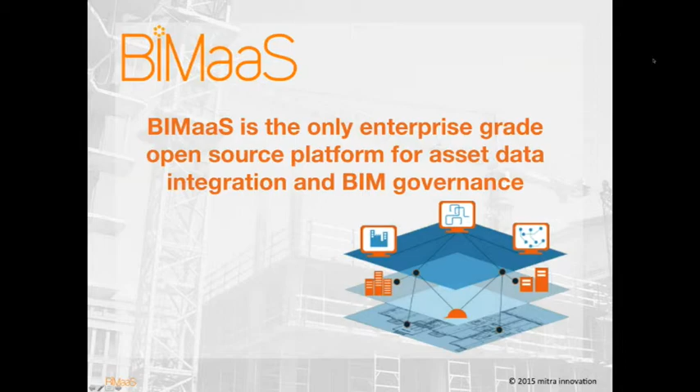Let me just start from where Ashok stopped. We are just going to talk about several key benefits on top of BIM as a service platform. So as Ashok mentioned, what we have built is a platform on top of a very sophisticated middleware platform called WSO2. So what BIM actually offers is a shared and collaborative platform.

The underlying platform of BIM is something called Industry Foundation Classes, also known as IFC, which comes with a specification. An IFC file actually contains the geometry of a particular building, whether it's a horizontal construction or a vertical construction, and it has so much information.

The idea is that you can actually share this file between different parties and get it into one single place, what we call the common data environment. So ultimately what you have is the power of information, where you have a central model to work with.

So what we do basically in the platform is provide 6 different benefits, which are: share, collaborate, analyze, visualize, govern, and learn.

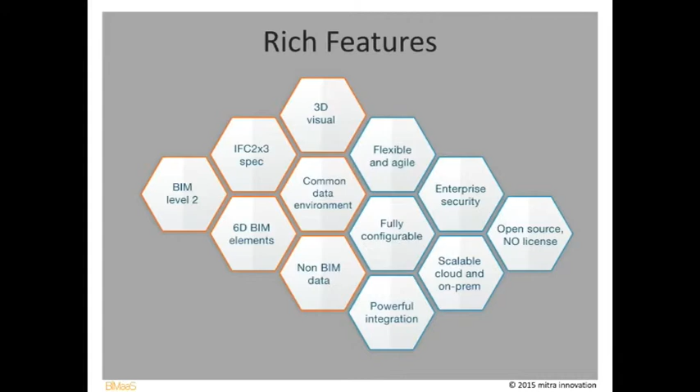So coming back, a high-level set of rich features from the application: we have 3D visualization, and we support the IFC 2x3 specification right now. Soon we are going to support IFC 4 as well. So right now, anybody who adopts the system eventually gets BIM level 2 compatibility.

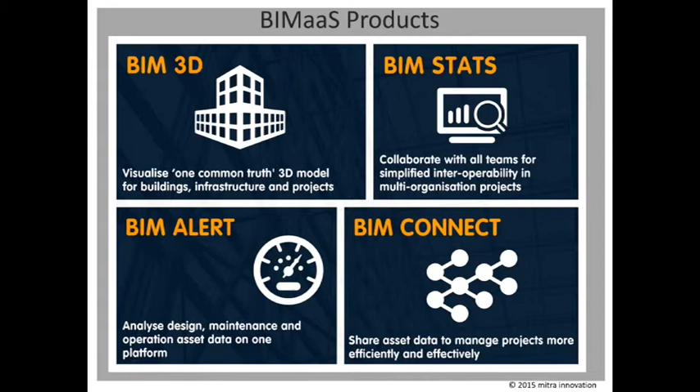We also have built-in functionality with our integration platform to support up to 6D BIM elements. As you know, the 4D and 5D elements of BIM talk about time and cost, and 6D talks about operational aspects where facility management comes into play. We have real good capability with our underlying platform to easily integrate financial systems, project management systems, and facility management systems into one single place.

So you can see a common data environment, known as CDE, is really capable with our platform. Any application that is BIM compatible, like ArchiCAD or Autodesk Revit, is capable of producing IFC files. But if there are non-BIM applications not capable of generating IFC compatible files, we should be able to convert them using different plugins and extract information into our platform, which has the capability of converting those into BIM compatible data.

Our platform is very highly configurable, so we can have configuration modules to cater to any kind of scenario. It's very flexible, very scalable, and can run either in the cloud or as on-premise installations. And the best part is the solution is offered as open source.

We have on our site a listing of where the source is located - it's a GitHub account. Anybody can download the source, compile it, and start using it. There's no commercial license; it's offered under Apache 2.0. But of course, we have our support agreements for whoever likes to implement the project and go ahead with it.

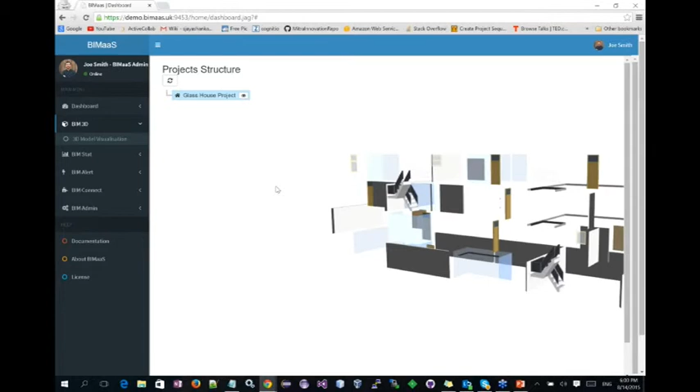Let me go to the BIM 3D, which is our visualization platform. You can see this Glass House project is listed here. I can just click on it, and the project is plotting now. This project is actually created based on the geometry of the IFC file that we submitted to the platform, so now I can visualize this whole model.

I can zoom in, zoom out, see the elements inside the project, and see all the elements of this particular project. I can list them down, and this will show you the project structure of that IFC file. It has different buildings, and inside the different buildings you will have different elements configured for this model.

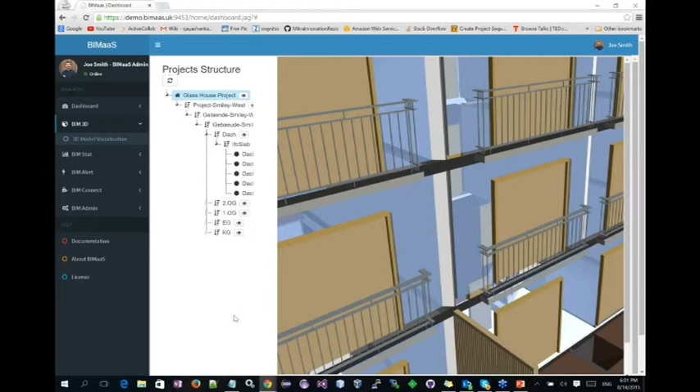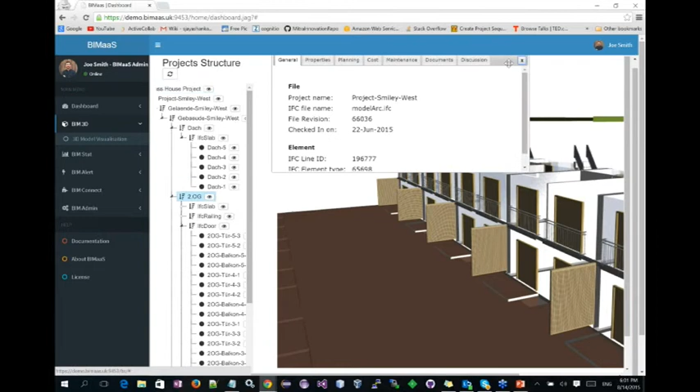I can identify the doors, the windows, and all that information here from the project breakdown. I can also turn off and turn on certain elements of the project. So if I turn this element off, I can completely take off this third story. I can look through, and if I want to view it again, I just click it back so that it comes back again.

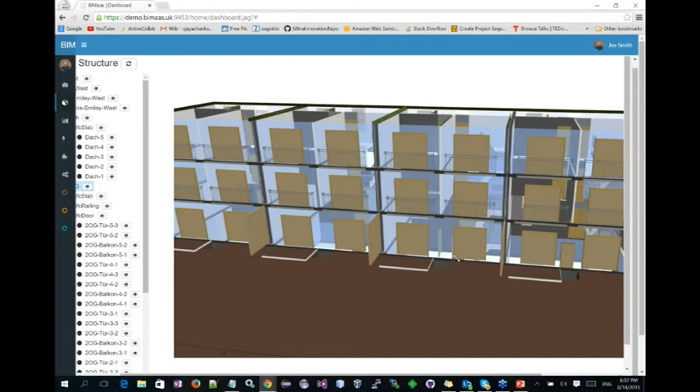The one cool thing about this is the information window. When I click on a particular element, this window comes up and gives you information about that element. So I just clicked on a door, and this provides me the project names, the element information - that it's a door - all the global IDs, and also the properties pertaining to that particular door.

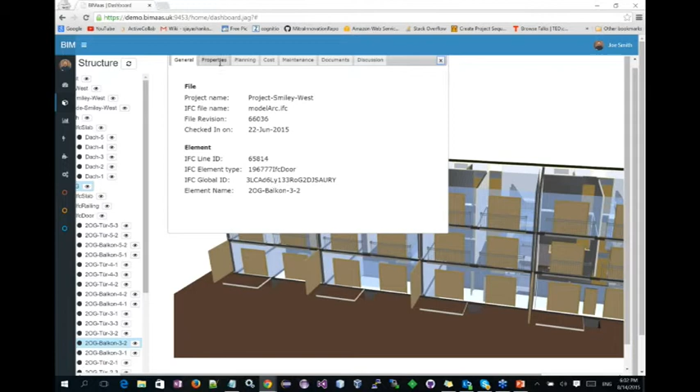So if the engineers had modeled this particular door with all the information that is needed, it will list based on the information in the model. This is where integration comes into play, where you have everything in one single place.

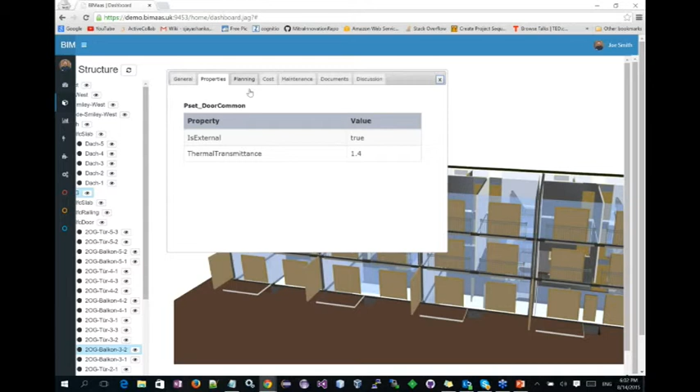If the whole thing is integrated correctly, let's say we have connected the planning system and your financial system together into this, you would be able to see your financial planning system information here. Basically, if there's a task of fixing this door in this particular flow, you will have the date the door is going to be purchased, when it's going to be fixed, and with your progress and all that, you can easily integrate your project management information here.

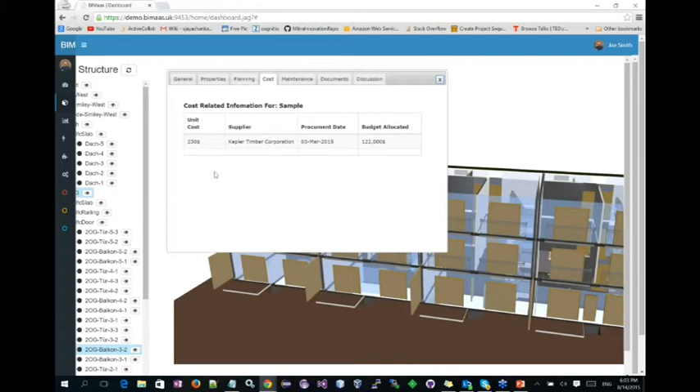At the same time, you can actually include the cost related information which is coming from your costing system, and you will have whatever information is needed here. The good thing is that all this information is very customizable, so that you can create the view based on your requirement. It's a matter of our connected platform, the BIMaaS Connect, which would actually cater any kind of integration, and it has the ability to display it here with whatever is needed.

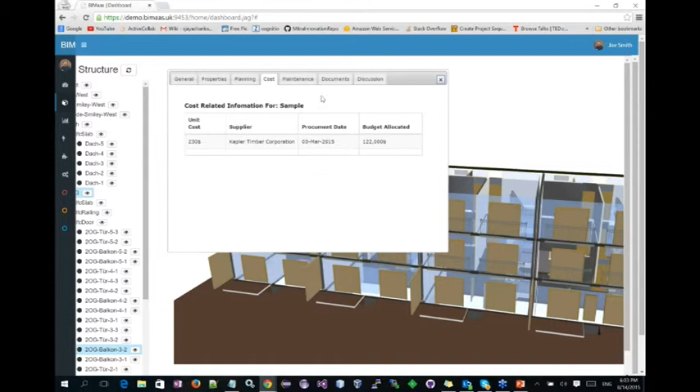If you go to maintenance, you can see we are connecting to the facility management system, and it is picking up your maintenance record, and you can just show it here. And the document tab actually provides you the information, probably the documents which are connected to this.

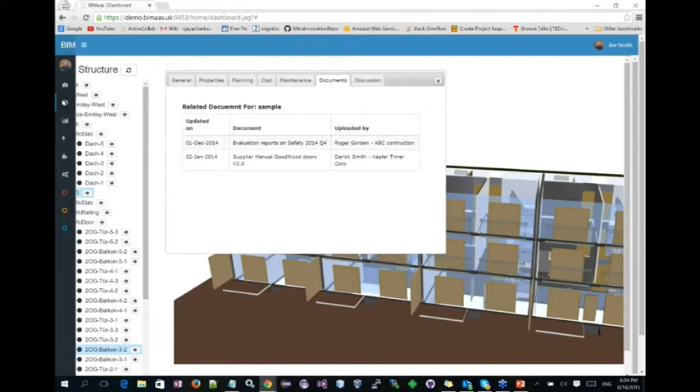Maybe it's not relevant to a door, but imagine if you have a boiler or any other mechanical equipment placed in the building. So what you simply do is you can navigate to the building and click on that mechanical information, and it will pick up all the related documents for that particular element, and you can simply download it here.

You know the nightmare that you would have when you need to find the supplier to get the document, get the user manual, or get the operation manual. You will have a lot of problems finding all these documents. But with a system like this and an integrated data platform, you simply need to log into the building model, navigate to the particular area that you need, click on it, and you will have the information that is needed.

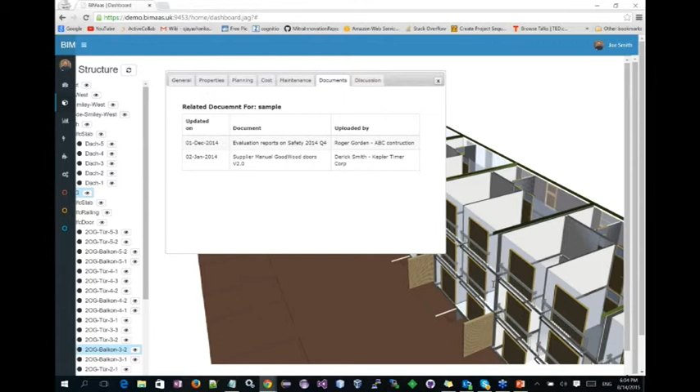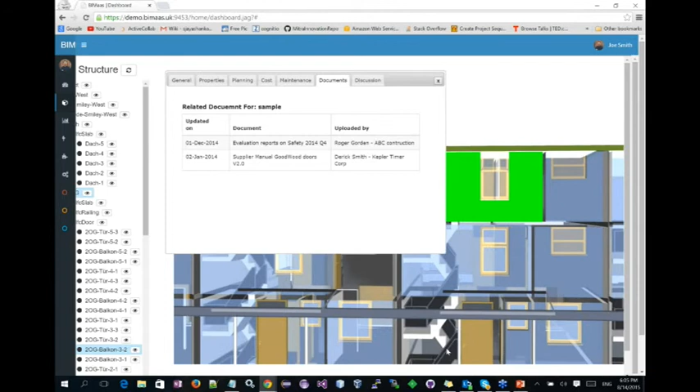The other thing is, before construction starts, engineers can have a discussion around a particular issue. Anybody who's reviewing this can click on an element. Maybe there is an issue with this particular staircase - I just click on that staircase and I can start a discussion here, just like a chat window, type anything and send it. So this complete discussion will be captured, and whoever logs in will be able to see this discussion, and if there's an issue, they should be able to correct it based on that.

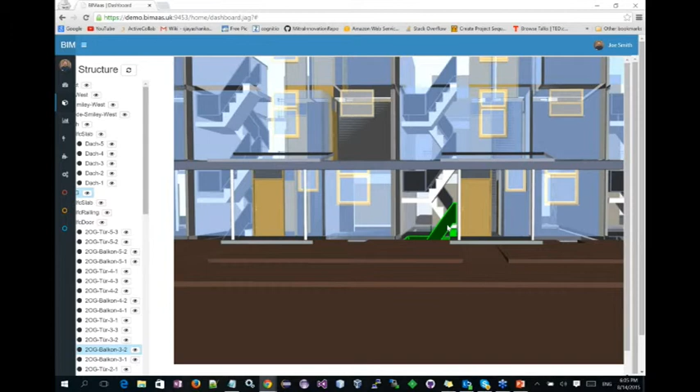So ideally, whenever you have an issue for a particular element, we have a place of keeping all the data, and all the discussions go on there.

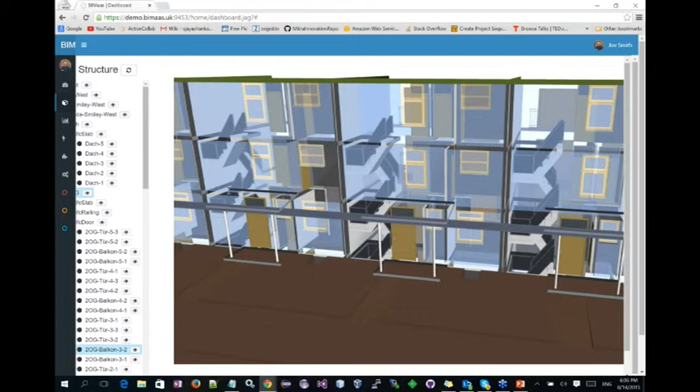We are in the process of doing a lot of changes to this 3D model. Some cool features are going to be out soon. We are going to bring a lot of analytical features into the 3D model, where you can extract certain classes out, so that you can perform slicing and dicing on the model itself. And that's basically about 3D modeling. There's many more features like that.

So another case is BIM alert, the one that I mentioned in the previous slide, talking about compliance. We have built-in compliance, which is provided by Building Smart - that is model validation version 2.0, which actually validates the BIM model based on the specification. So whenever you submit a BIM IFC file, it validates it.

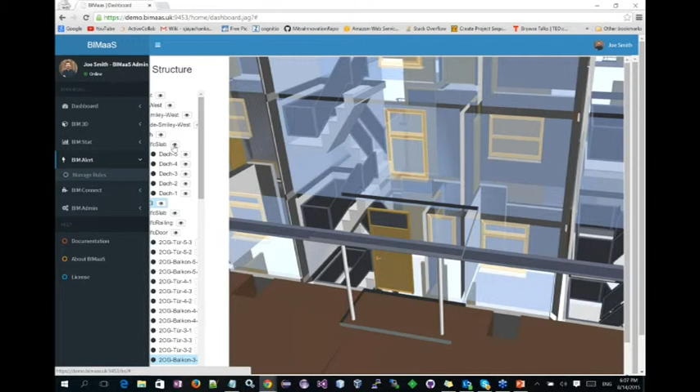Other than that, we can configure our own rules. If you have a project and an organization that follows certain rules, we can go to the Manage Rules section, where you can specify different customized rules. Here is a sample rule specification - we can specifically say certain rules to be built. For example, beam dimension ratio rule, we can specify width to height ratio should be 0.6, and space between columns to beam depth ratio, we have to give a value here.

So once you give these kinds of values, we are building our own set of rules which will execute against the model that you submitted to the system. It automatically calculates and sees whether the values are correct based on the rules given. And if there is a problem or discrepancy, it will alert the user saying that you have a problem in your model that you submitted.

So that's a very, very simple demo about our platform. Let me go back to the slides.

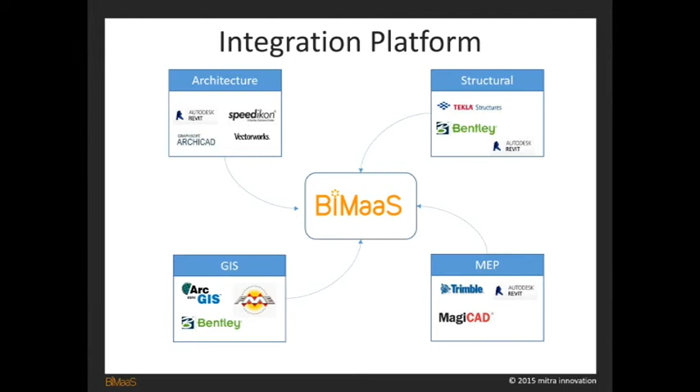So just talk a little about our integration platform. As you saw in the demo, there are many ways of integrating systems - your financial systems, project management system, and facility management systems could all be integrated. That's a key part of our application, because the engineering parts we've talked about - structural, MEP, GIS systems - show how you can integrate to our system. But the best part is that non-CAD based applications, such as Oracle Primavera or IBM's facility management systems, can all get this data into one platform, connected into a single environment called a common data environment. That's the offering from this platform.

Right, I think this brings us to the question and answer section. If you have any questions, we can answer right now. Thanks, Sudaraka. I think we have three questions. The first is about the GitHub repo. Yeah, so I think we have the information, and we can email it to everybody after this webinar, and publish the GitHub location - it will go onto our website as well.

The second question is, how do you create the rules? I think in BIM Alert we can define the rules. One thing is, the rules are now based on the extended model checker feature. We have a base model checker coming from the platform itself to validate the BIM model. But when you need different rules, you saw the BIM Alert section where you can create different rules. The only thing is, you don't actually create the rule yourself - rules are created one time based on the company's standard or culture. What we can do is, once rules are created, the user can enter values so you can change the threshold of the rules. But when you actually need to create new rules, you need to configure that from the back end of the system.